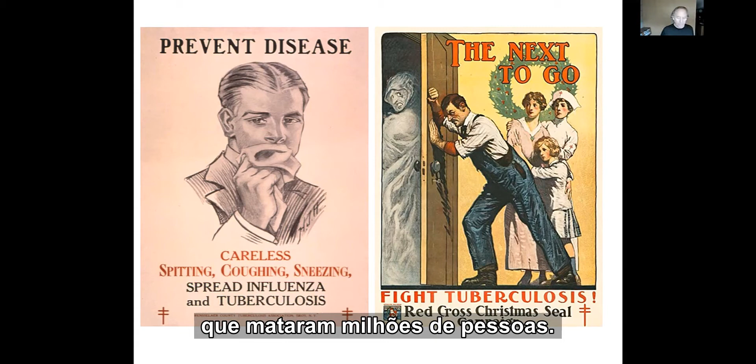And the reason was this: after World War I, the world was suffering from the after effects of tuberculosis and the influenza that killed millions of people. Florence Nightingale, 40 years earlier in the Crimean War, had finally put together that cleanliness and fresh air reduced disease significantly. She thought disease was carried by the miasma, that it was carried in bad air. Then Robert Koch and Louis Pasteur explained germ theory, that it wasn't just bad air, but the stuff that was carried in air, in water, and on surfaces.

Architects started cluing into this, and this is how we got modernism. Buildings that were full of sunlight and fresh air and that were easy to keep clean. Started with tuberculosis sanitariums, like Aalto in Finland, setting an example here, where all the furniture was tubular and easy to clean, or plywood that could be just wiped down.

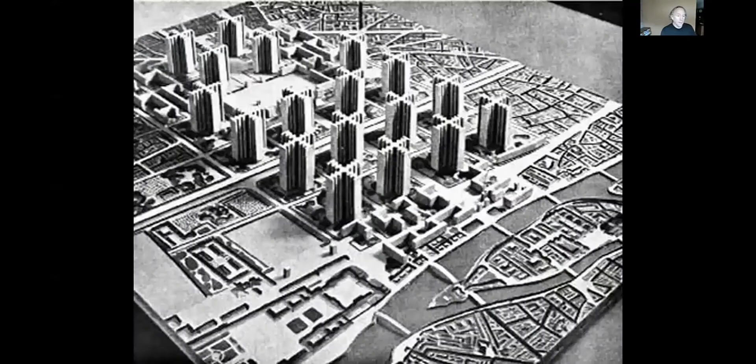And architects learned from this. In particular, the first of these houses were designed for doctors, like the Lovell Health House, or the Maison de Verre, which was designed for a gynecologist, where every surface in the house was washable. And of course, the Villa Savoye up on stilts to keep it away from the dirt, which Le Corbusier thought was filthy. Everybody is appalled by the radiant city proposed by Corb, but in fact, at the time, there were serious plans for demolishing most of Paris because nobody had toilets and everybody was crowded together, and it was all about health and air.

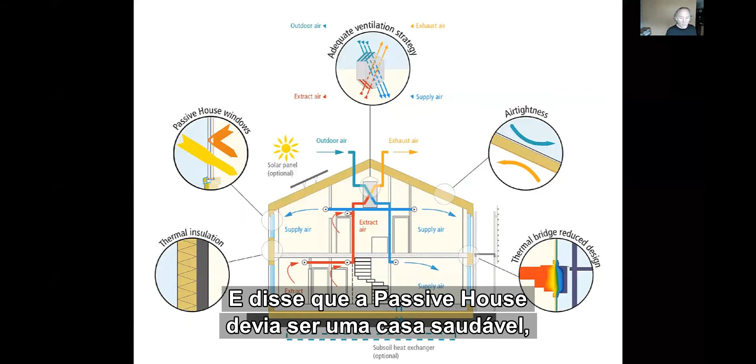Then penicillin came along. It killed all these bugs. We brought vaccines for tuberculosis and polio, and the diseases that terrorized our cities were beaten in most of the developed world. When I spoke here 2 years ago, I was concerned about the upcoming antibiotic resistance and how we had to start thinking about building like we did before we had antibiotics. And I said Passive House should be the healthy house, that we should own this sector with its sealed walls and its filtered fresh air and its insulation that in colder climates made it possible to get decent humidity without condensation.

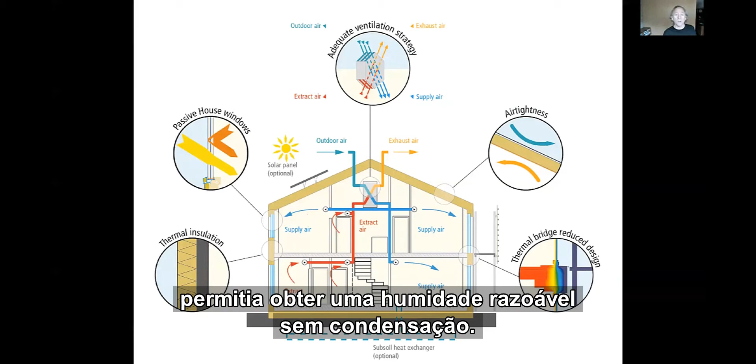And now we have this, the coronavirus. No vaccines, well, maybe a vaccine was just announced. And it's more important than ever that Passive House be placed in this sector as the healthy house.

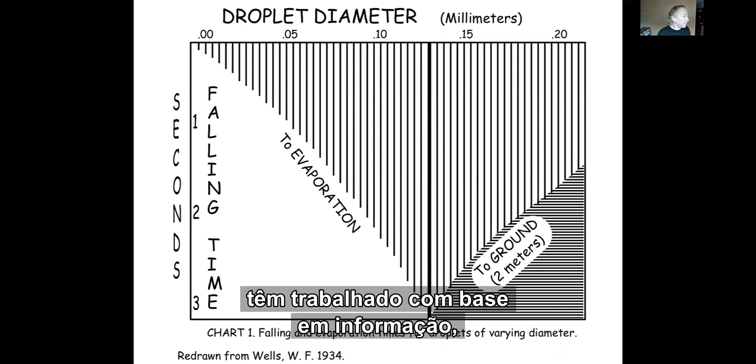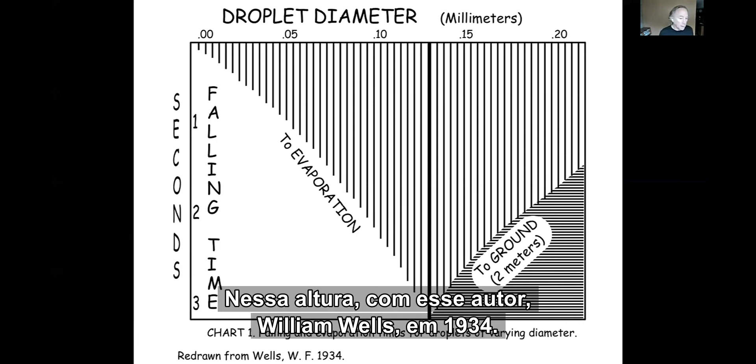Now, this has been controversial for the last couple of months because all of the doctors and all of the people at the various health agencies have been working on information that goes back to the 1930s, that flu and tuberculosis and viruses are carried on droplets by touching stuff where the droplets fall, which is why you've got to be able to wash everything, and where the 2-meter rule came from. Back there, from this guy, William Wells in 1934. Or in Canada, we have to stay 1 moose apart.

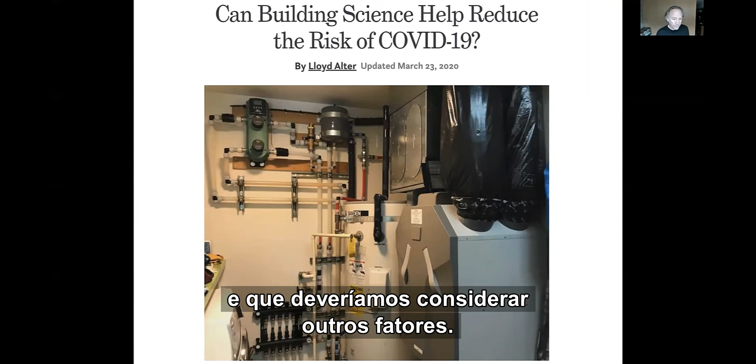But even back in March, the building science people, the people who knew about how air moves, started suggesting that there was more to it and we should be considering other factors. I wrote back in March that ventilation is critical.

Another point is that in a Passive House building, the interior air is not filtered and recirculated as it is in normal homes and offices. It is exhausted and replaced with fresh outside air through the heat recovery ventilator.

In around April, the European engineers started recommending that we should stop recirculating air in buildings at all, and calling for what they called hygiene ventilation. Architect Justin Bere wrote from London that COVID-19 should be a wake-up call for the building industry, for governments, and for statutory regulators of the construction industry.

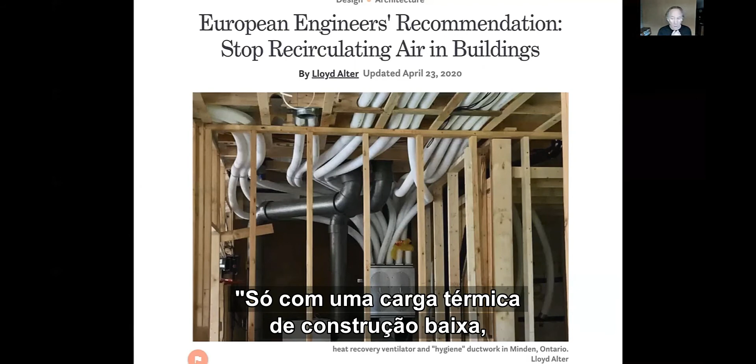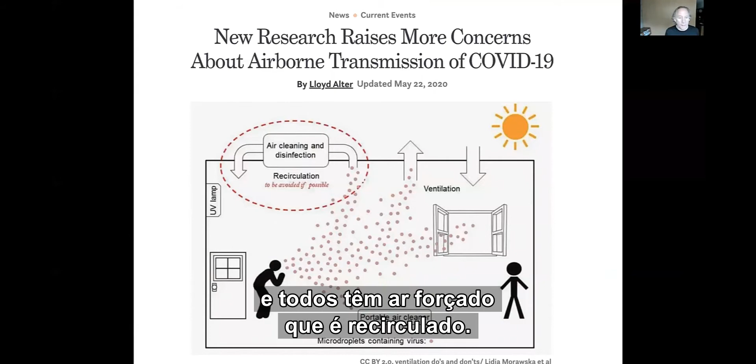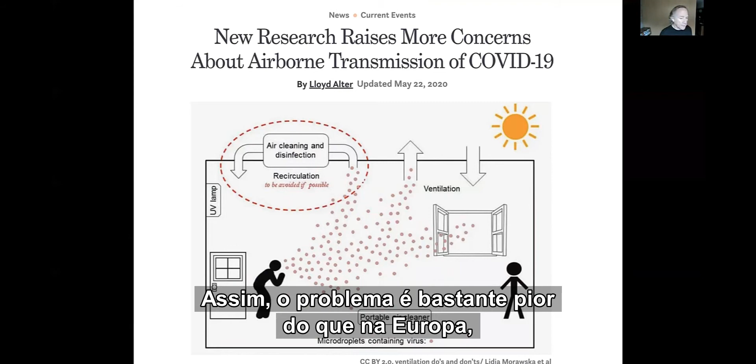It's only when building heat load is very small, as it is in a Passive House building, that hygiene ventilation is possible at all. Now, I should explain that in North America, nobody has radiators and everybody has forced air that is recirculated. The air carries the heating and the cooling, and it also gives you some fresh air. And so the problem is much worse than it is in Europe, where they do not have constant recirculating air systems to the same degree.

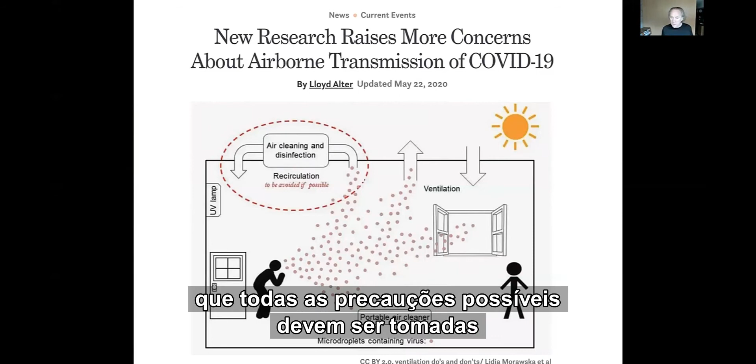And more research was being done that this recirculating of air was really terrible. And scientists were saying all precautions possible should be taken against airborne transmission in indoor spaces. That includes increasing the ventilation rate, using natural ventilation, and avoiding air recirculation.

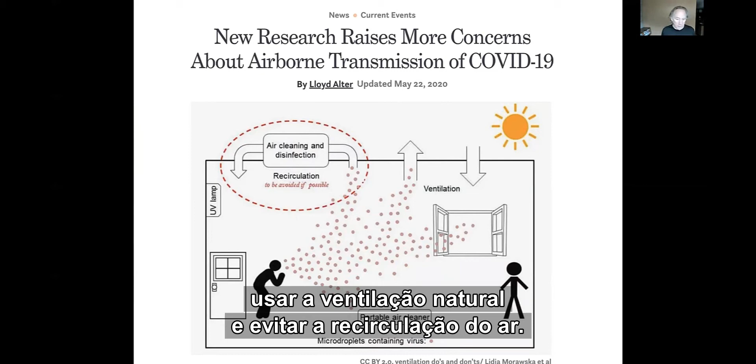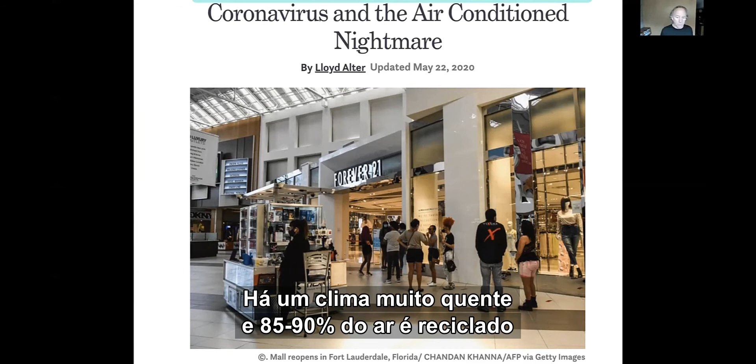In America in particular, this is almost impossible. You get into a really hot climate and they're recirculating 85, 90% of the air, and suddenly they're being asked to bring in 100% of air. Well, they didn't. They couldn't, because the systems aren't designed that way.

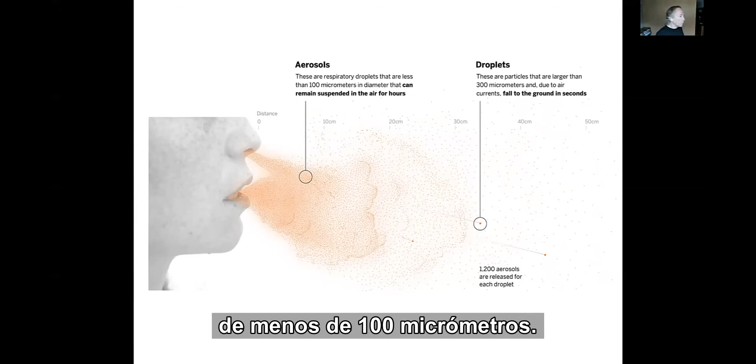By July, researchers and building scientists were demanding that the World Health Organization start accepting that this is happening, that it's being carried as an aerosol and not as droplets. And they started getting really noisy, but it was more and more clear that it's carried on respiratory droplets less than 100 micrometers. And it's less like stuff that falls to the ground and more like cigarette smoke. If somebody's on the other side of the room, you smell that smoke. It moves and fills the whole room.

It was also controversial. In the United States, it wasn't until September where the Center for Disease Control finally admitted that it could travel as an aerosol. And I thought this was going to be really, really significant. Trump was president, and basically I said, you don't want to go to a Trump rally or any other crowded, poorly ventilated indoor space where people aren't wearing masks. This doesn't bode well for the restaurant industry, where people are close together, and it raises many questions about kids going back to school.

Well, this was evidently too controversial, because they actually pulled this 3 days later and went back to the old advice. And finally, on October 6th, they agreed there might be something, but they were so wishy-washy about it and said there is evidence that under certain conditions, people with COVID-19 seem to have infected others more than 6 feet away.

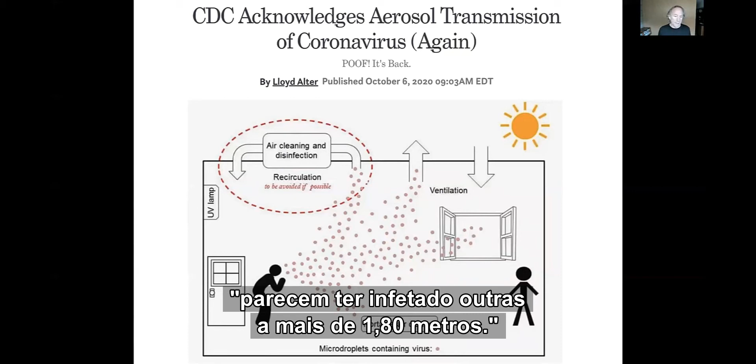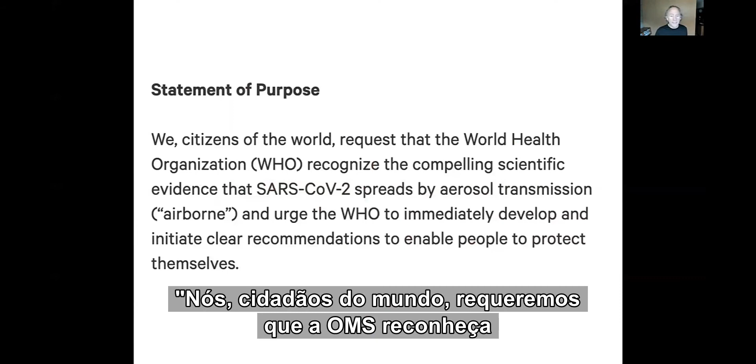In the last couple of weeks, the building scientists have been getting really upset and demanding that the WHO change their approach. They've been putting out this petition that's, I think, now up to 8,000 signatures: 'We, citizens of the world, request the WHO recognize the compelling scientific evidence that SARS spreads by aerosol transmission.'

Robert Bean, who is an expert on passivhaus ventilation, was one of the people who just on the 5th of November was saying, what, not one building engineer on the WHO team? What does society call a professional who practices in a field they're not qualified to practice in? Unethical. They're really upset that they don't have the right people looking at this.

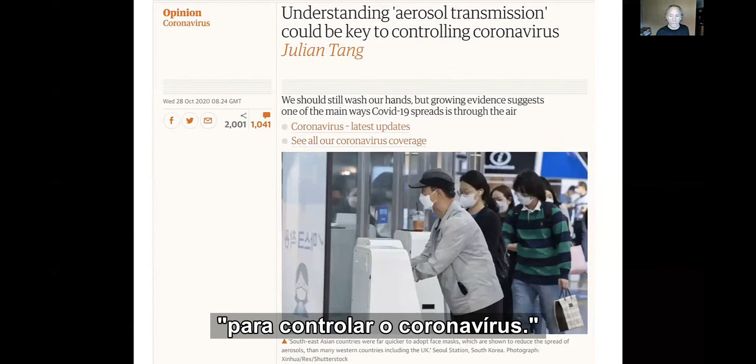And even just last week, people are writing, understanding aerosol transmission could be key to controlling coronavirus. And just last week, the Prime Minister of Canada finally recognized that there's increasing evidence that aerosol spread is a vector of transmission. And this is where Passivhaus shines. This is where we have been and can be and will be. They've been saying this all along.

As Courtney Rodney Brown wrote in this article back in August, hygiene ventilation focuses on using 100% fresh air to ensure the viruses are not recirculated in enclosed areas, whether commercial buildings or homes. Passivhaus presents itself as the environmentally and economically sustainable option, one that has been employing hygiene ventilation as one of its basic tenets in the form of balanced ventilation.

Jonathan Cairns, an architect of many passivhouses, including this beautiful passivhaus renovation you see here, his firm wrote that Passivhaus presents a wonderful opportunity to build better, create healthy environments, to future-proof our buildings. The standard has the ability to respond to COVID-19 while not ignoring climate change, as the systems it employs allow for total building design where environments are healthy, energy is saved, and emissions are avoided.

And Dr. Feist, one of the co-founders of Passivhaus, pitched in too. To explain, a ventilation system with heat recovery brings fresh, hygienically clean air into the home. This is not recirculated air, which has been the cause of concern to some. Systems certified for Passivhaus have good filters, which significantly reduce germs more than a conventional mask. Passivhaus buildings are good for health, he said.

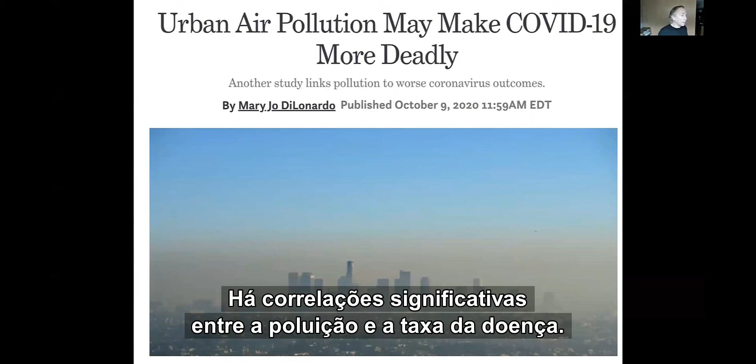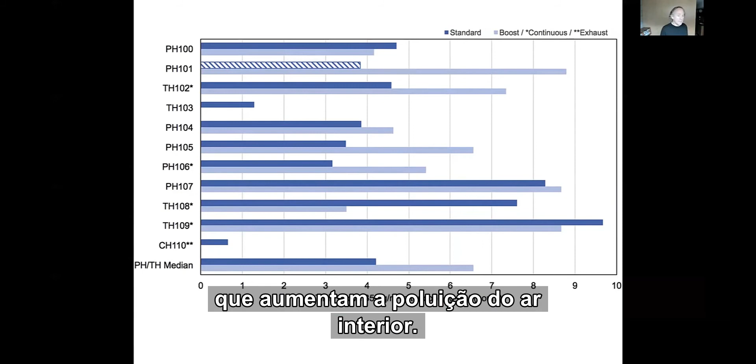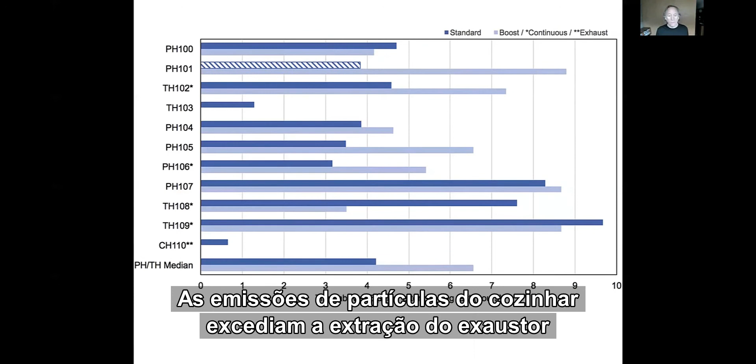And yet when we design our kitchens, we've all, even in Passivhauses, been designing them in ways that increase internal air pollution. This study was actually done in Passivhauses. None of the Passivhauses had range hoods that exhausted directly to the outdoors and instead were recirculating. This strategy did not prove to be effective. The particulate emissions from cooking overwhelmed any exhaust removal and spread to the rest of the house, and concentrations remained high for several hours.

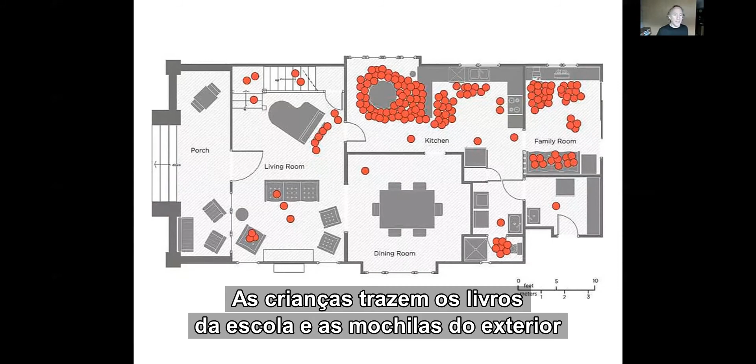And in America in particular, this is how everybody is designing their houses. Everybody's spending all of their time around the kitchen table. Kids bring their school books and their bags from outside in, and everything gets dragged into the kitchen where people are trying to cook as well. It was the American fantasy in the 1950s and the 1960s, and it still is, where everybody's putting in giant gas stoves with no proper ventilation.

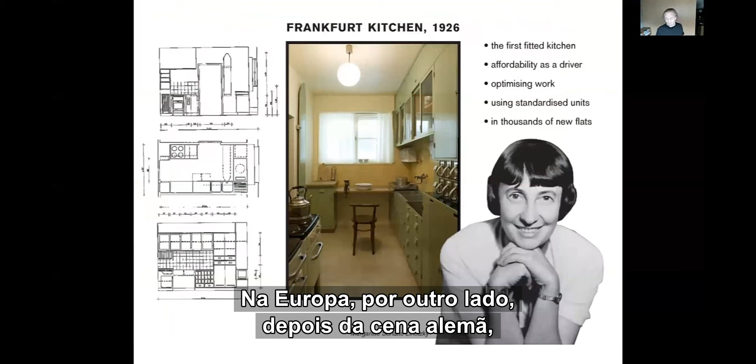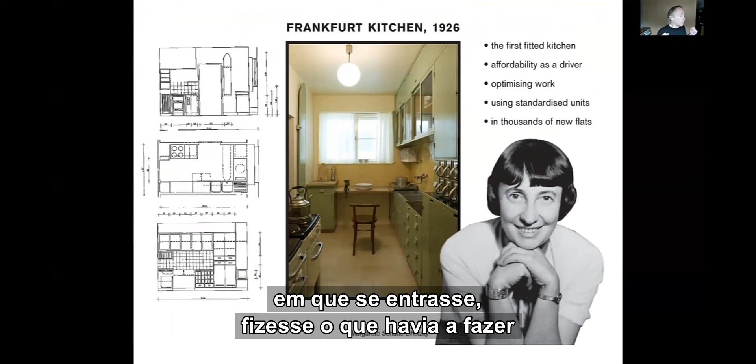In Europe, on the other hand, after that German scene, they started developing the Frankfurt kitchen, where Margarete Schütte-Lihotzky proposed that it all be one very small space, that you go in, you do your work, and then you go out and live your lives, and that it's designed almost like a hospital room so that everything can be cleaned. And there were lots of them. But it's not what people seem to want. They want to fill their whole place, with all the pollution and PM 2.5 that comes off cooking in gas stoves.

In China, where you have to have the kitchen enclosed because of the flash cooking that they do, they actually are now selling kitchens where it looks like a Western kitchen. The counter might run right through the glass, but they're enclosing the whole thing in glass so that they can get proper separation of ventilation. We have to start thinking like this in Passivhauses again.

We also have to think about our bathrooms. There's a reason Le Corbusier put the sink in the hall, so that everybody who comes home can actually wash their hands before they do anything else. Even in one of the most luxurious houses ever built at the time, this was the principle that was in play.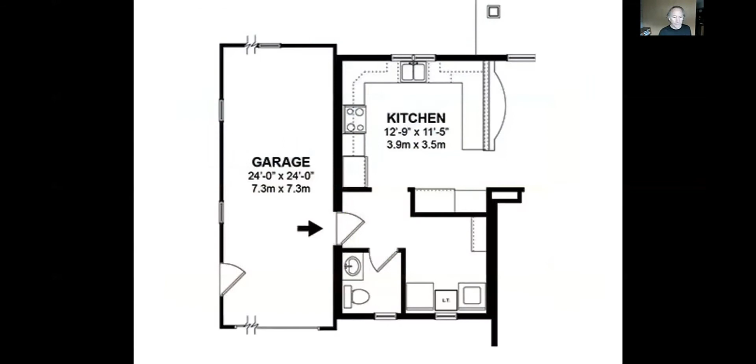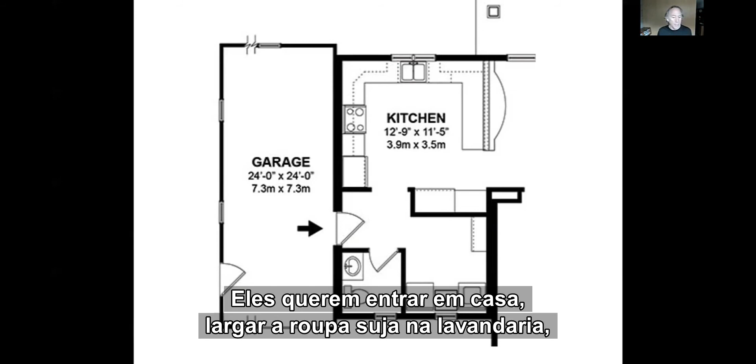When I used to work in real estate development, every house that our company sold, not prefab houses, had this arrangement where people would come in through the garage into a room which had the laundry and a bathroom. Being from the city, I asked the owner of the company why, and he said, they're farmers and they're workers. They want to come in, drop their dirty clothes in the laundry, change, wash up, and then grab a beer. It's the sequence of how they live.

Meanwhile, in Philadelphia, the architects of a project called the Onion Flats were looking at their plans, this was before the virus, and redesigning their bathrooms in a way that turned out to be really incredibly ingenious. To save space, they did this, but then the virus hit and they realized what they had.

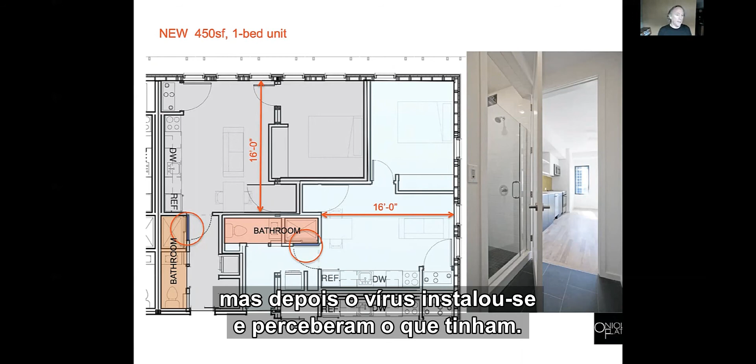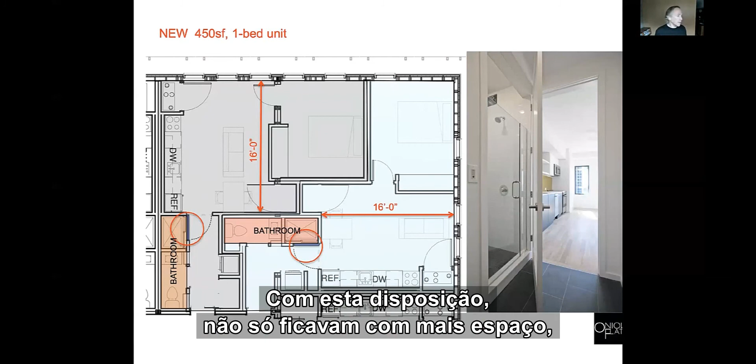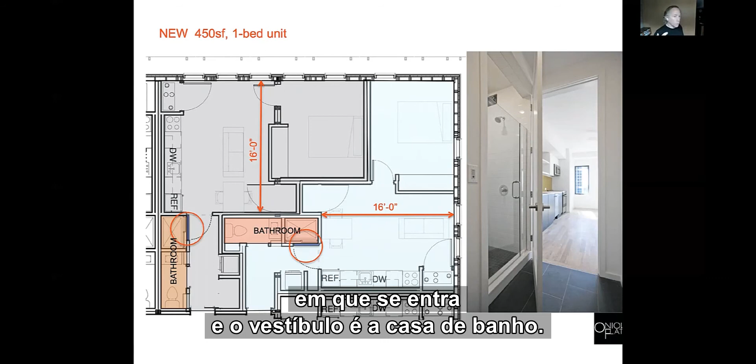Basically the vestibule, when you come into this little apartment, is the bathroom. You can close off the door to the rest of the apartment, and you've got a two-piece here, a shower there, the laundry machine opposite, and a closet. With this setup, they not only got more space, but they basically had a way that you could live in an apartment exactly like those people did in that country house, where you come in and your entry vestibule is your bathroom. And it's quite attractive.

And the shower is hidden behind that door when it's open. And when that door is closed, the place becomes a bathroom.

At the whole other end of the scale, this is work by Andres Duany for very expensive apartments in Florida, where you can see their outdoor corridors, which are more expensive, which is why they're out of fashion now. But it's back to the single loaded outside corridor, a big space in front of the front door, like an outdoor sitting area.

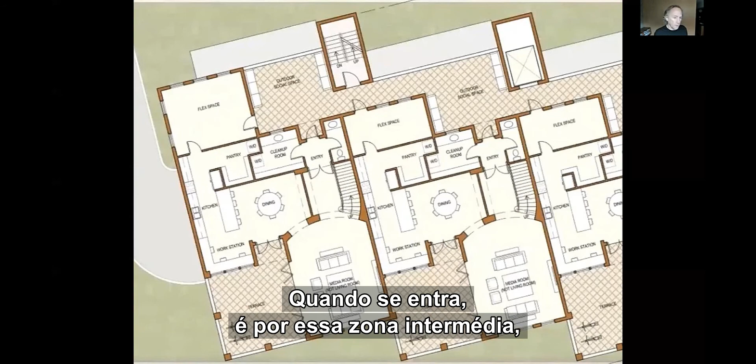When you enter, it's through that intermediate zone, an entry vestibule that leads right into a cleanup room. You can change your clothes, wash your hands, or go to the bathroom before you even come into your house. And then up at the top, there's a flex space, a room that opens directly to the outside, so it could be your home office where you meet people from the outside without having them come into your house.

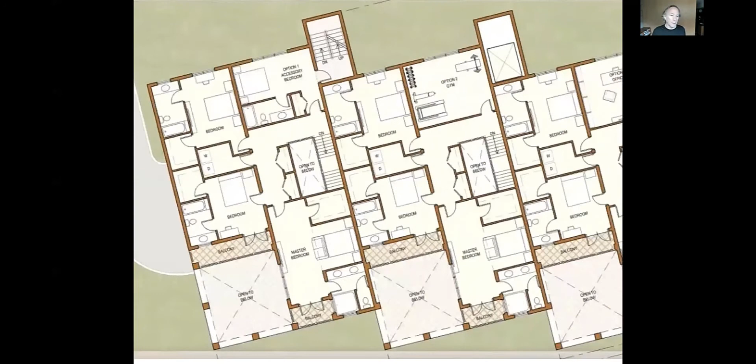On the second floor, there's a special bedroom with its own door to the outside as well, to the stairwell, so that if somebody in your house is sick and you've got medical help staying with you, there is a room they can be in.

Finally, we have to start thinking again differently about materials. Back in the 50s, they proposed that one day our home would be waterproof and that the housewife of 2000 could do her daily cleaning with a hose. It's not a bad idea.

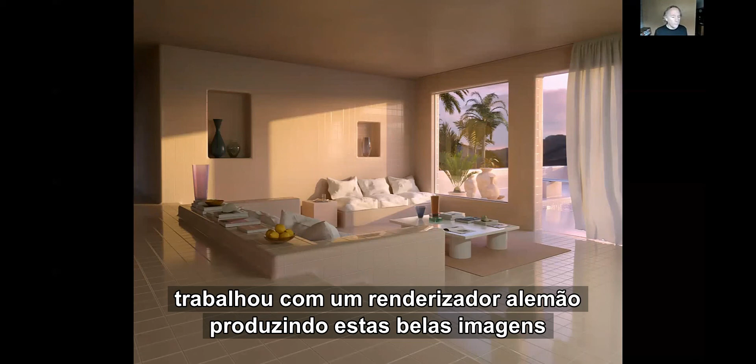A French architect, Charlotte Taylor, worked with a German renderer to create wonderful images of an entire apartment that is basically floor to ceiling tile. Even the furniture, even the couches are sort of built-in tile. And the bed, built-in tile. It's a bit much, but you get the sense that here's a whole house where you pick up the cushions and clean it with a hose.

Americans used a ton of vinyl in the 60s because it was easy to clean, but vinyl is virtually a solid fossil fuel with high embodied energy, and it releases phthalates, chemicals that are endocrine disruptors, so nobody wants to use vinyl anymore. But there are many different materials.

In my own house, I just used painted concrete on the floor. Italian companies, and now Chinese companies, are producing wonderful sheets of porcelain that cover the whole wall without a grout joint.

Different materials have antibacterial properties. The front door of my old house was wood, which is antibacterial, and brass. They made everything out of brass and copper for years—one of the main reasons was it was known to be antibacterial. I put on a copper plate for my push plate, and then recently put on a stainless doorknob. Pretty stupid thing to do now that I know what I know, but I'm not changing it now.

Marmoleum from Holland is antibacterial and a totally healthy material, made from jute and linseed oil. And then there's my favorite material, of course, cork from Portugal. I fell in love with it two years ago, and it really is my favorite now. It can be used for floors and walls and anywhere.

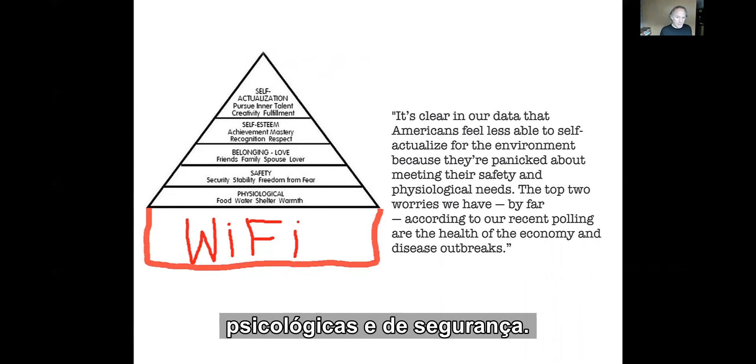Back to Suzanne Shelton again, who noted that our needs have changed, and what we're worried about has changed. In her survey, she found that in America, people are less worried about the higher levels of the old Maslow pyramid and more worried about basic safety and physiological needs. The two top worries by far are health of the economy and disease outbreaks. Health and safety are going to be a very big deal for quite a while now.

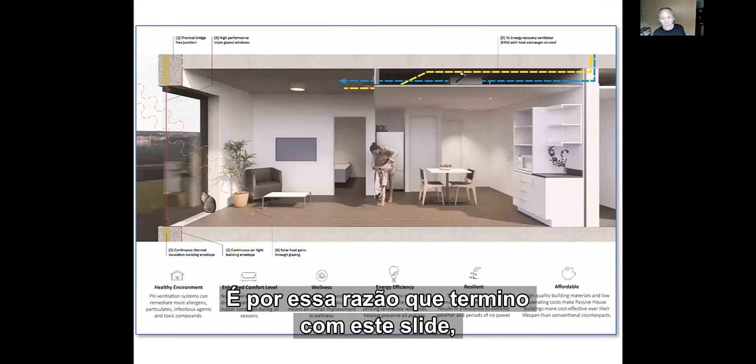That's why I'm going to end with this slide again from Cairns Mancini that lists the virtues of Passive House, and why I think it's so important to promote ourselves as the healthy solution. It's got a healthy environment, a good ventilation system that removes most of the allergens and also brings you continuous fresh air.

Enhanced comfort, no temperature swings. Wellness—we should be eliminating toxins, with continuous and consistent temperatures for an overall improvement in wellness. In colder countries than Portugal, controlling humidity is a very big issue. You can't get the humidity up to between 40 and 60% when you've got moisture condensing on your windows and mold forming on your walls.

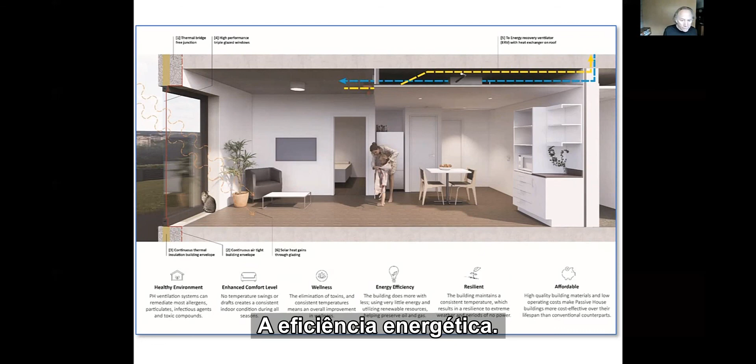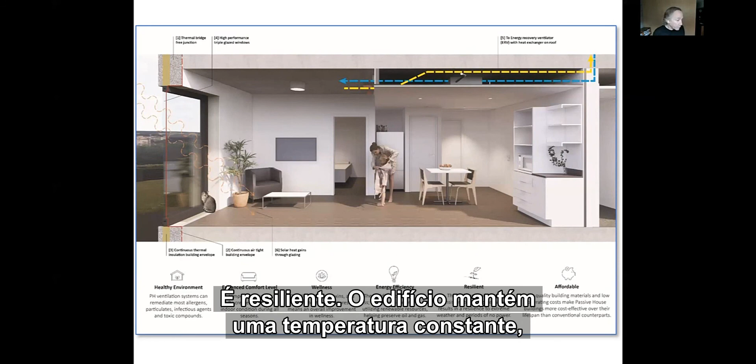Energy efficiency—the building does more with less, uses very little energy. It's resilient: the building maintains a constant temperature, which results in resilience to extreme weather and periods of no power. And it's affordable—when done well, it can be no more expensive than conventional buildings.